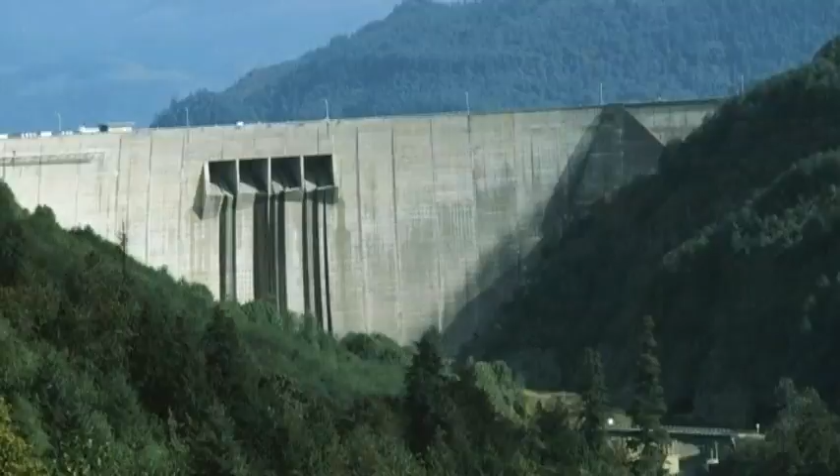Will you help us protect the world that we live in? This is the proposition of Trim Corporation Limited.

On the Earth that we live on, there are many problems that we have on our hands: global warming, air pollution, destruction of the ozone layer, contamination of seawater, and the heat island phenomenon. The garbage issue is an especially alarming matter. The illegal dumping of garbage prevails all over the country, and the environmental pollution it produces troubles Japan.

As part of this trend, some approaches for environmental improvements have been developed. The importance of recycling is growing.

However, among these, recycling glass bottles in particular has been falling behind. The amount being recycled is 350,000 tons. The recycling rate of glass bottles has halted before 40%. Why has recycling glass bottles been delayed in this area?

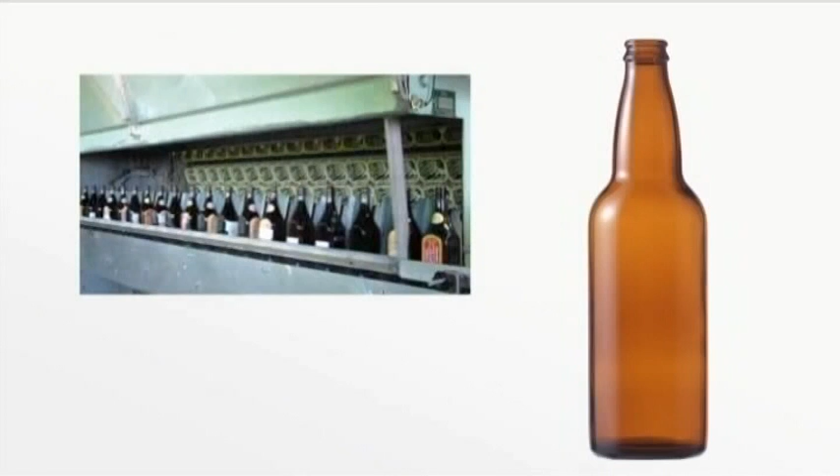There are two ways to recycle glass bottles. One is the returnable system, which reuses the used glass bottles repeatedly. The other is the one-way system, which uses the raw materials of new glass after smashing them to pieces.

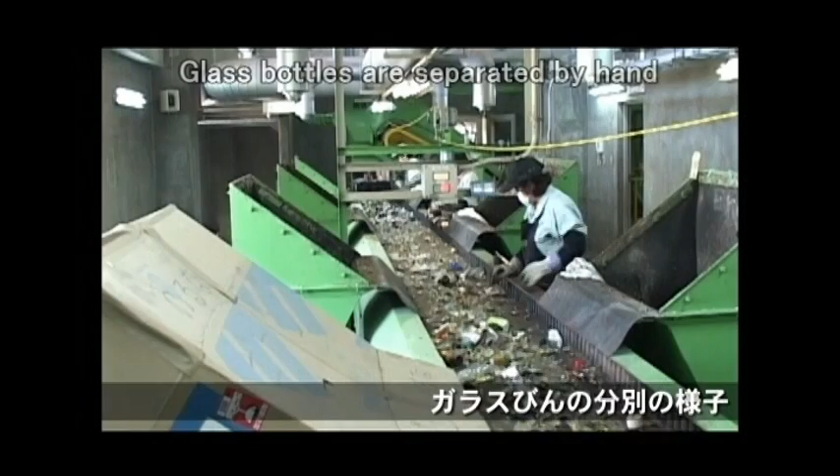Both ways cost time, effort, and money. Even today, at repository sites, glass bottles are still separated by hand. Among those are broken bottles to be handled with risks. A major stumbling block in the garbage issue is the recycling of glass bottles.

Are we actually able to recycle these glass bottles? This was the matter that became the starting point for the recycling business of Trim Corporation Limited.

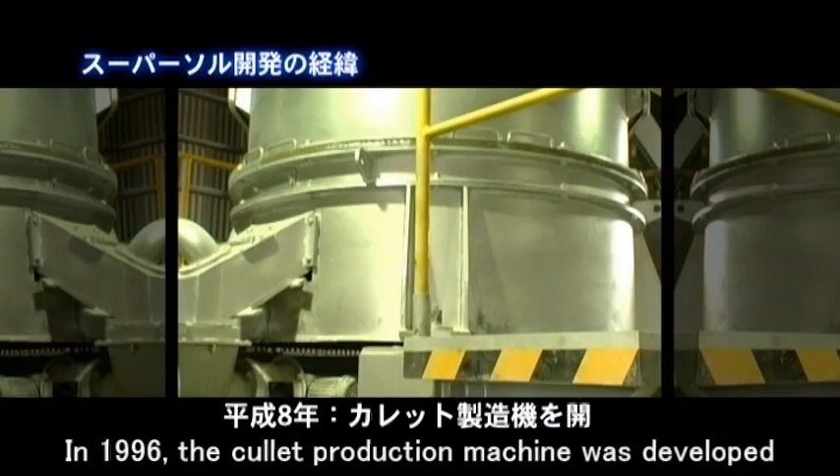In 1995, a project team to recycle glass bottles was formed. In 1996, the cullet production machine was developed. We won the top prize at the Industrials Festival in Okinawa. We invested and studied even more to enhance the system.

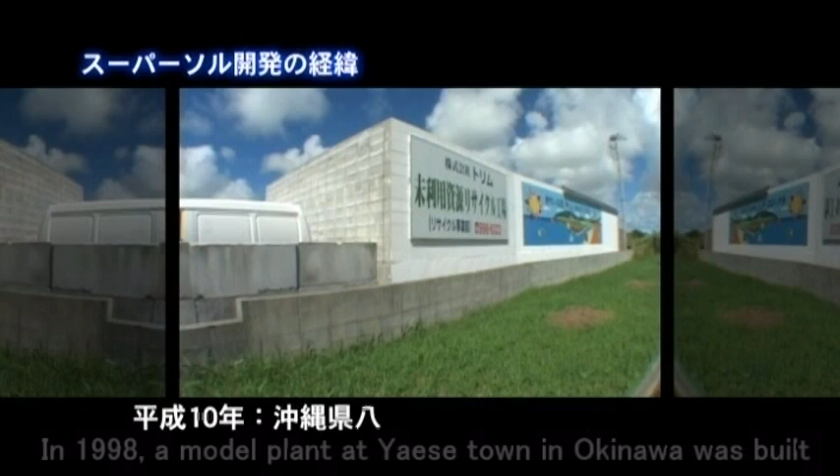In 1998, a model plant at Yaese Town in Okinawa was built. In 1999, the creation of the lightweight material Supersol was started. Then the recycling business of Trim Corporation Limited was fully put into action. In a variety of areas, a huge demand for Supersol was born.

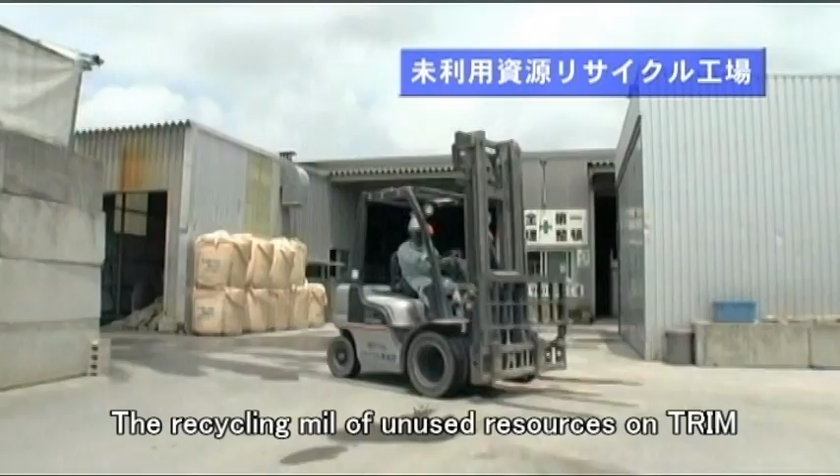The recycling mill of unused resources at Trim Corporation Limited can produce this material Supersol, which is completely different from the shape and features of glass, although made from glass bottles.

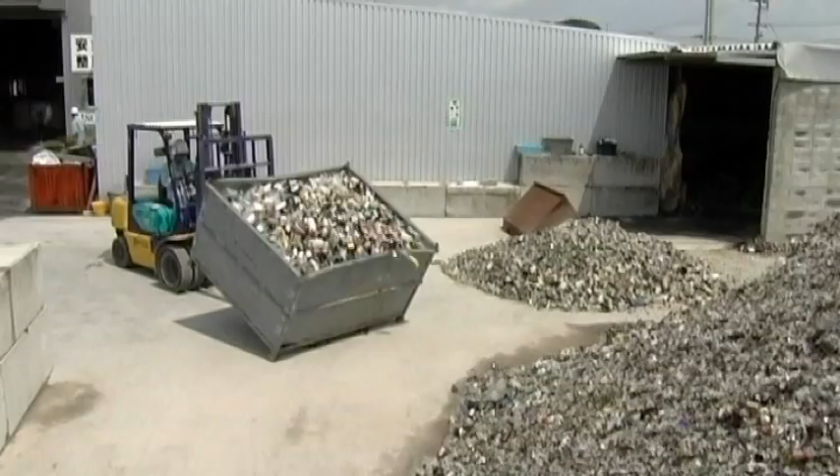The recycled glass bottles used at this mill are the same waste-collected bottles from the community. Regardless of color, size, and shape, you only have to throw the glass bottles into the machine. Then the Supersol is automatically produced.

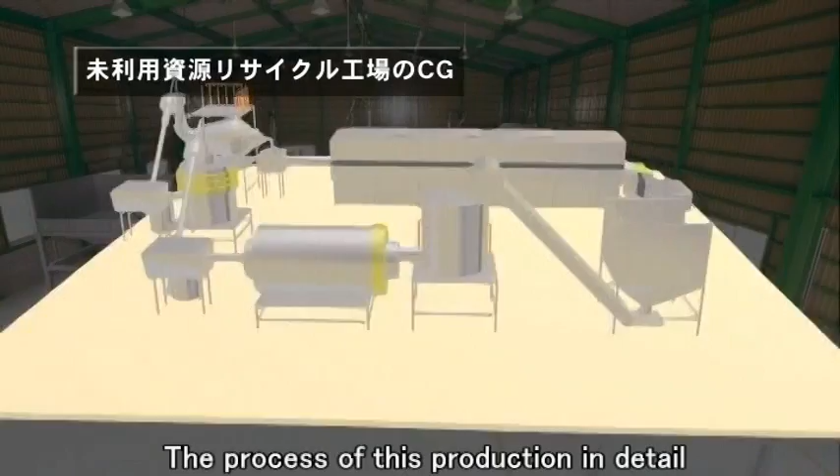Now, let's look at the process of this production in detail. First of all, the glass bottles are thrown into stock in the raw material hopper, then move automatically on the line.

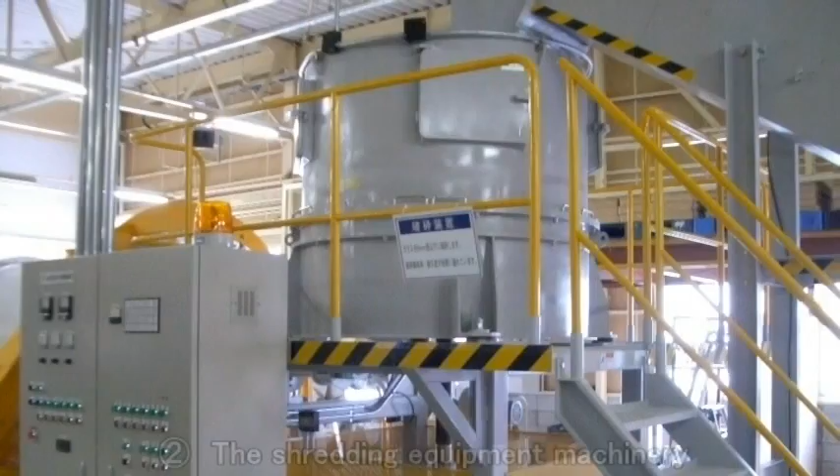Then they are smashed into very small pieces by the shredding equipment machinery. Though it is compact glass, even said to be harder than iron, they are pressed into small pieces.

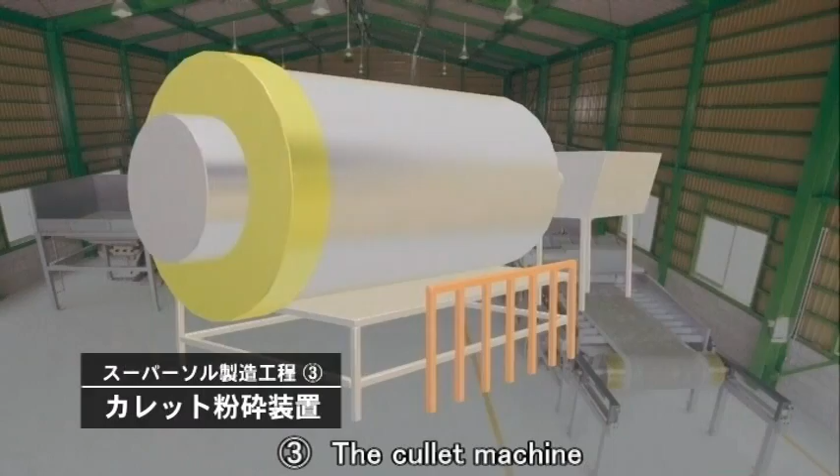The small pieces are routed to the cullet machine. On this pressing machine, the glass is crushed into a very soft, flour-like powder. It is hard to even think it was glass.

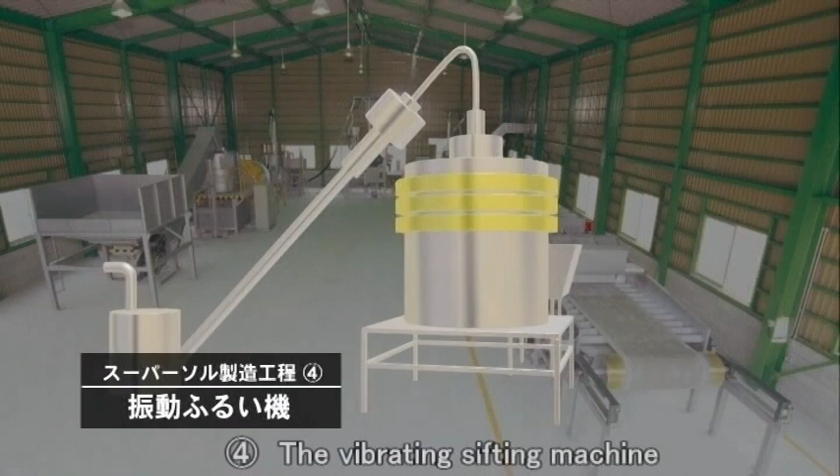The powdered glass is then moved to the vibrating sifting machine to specifically select only the finest powder.

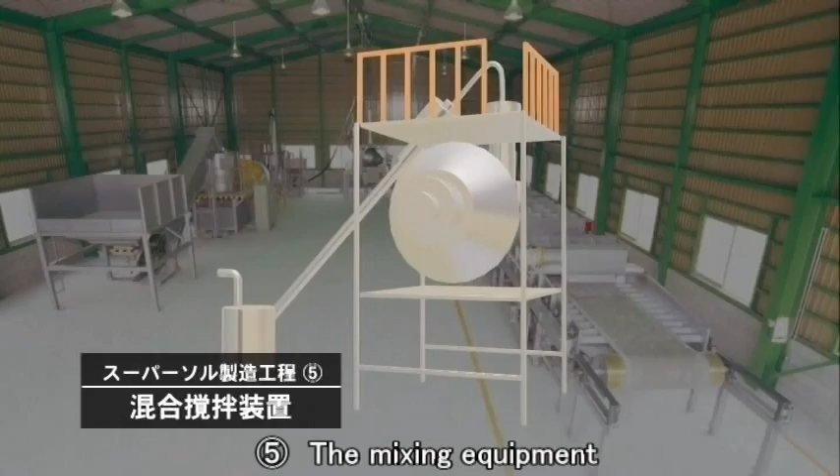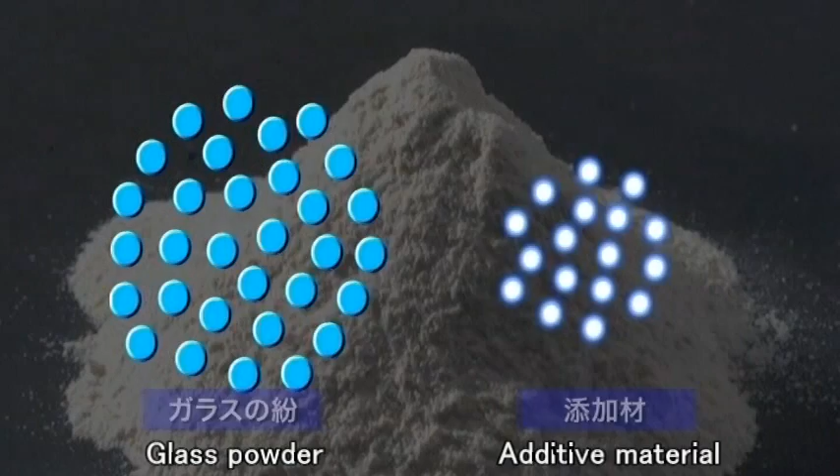Next, the glass powder is placed into the mixing equipment, where it is automatically mixed with only 1% additive material. Evenly mixing and sifting the glass powder and additive material, this process can finally produce Supersol with consistency and quality.

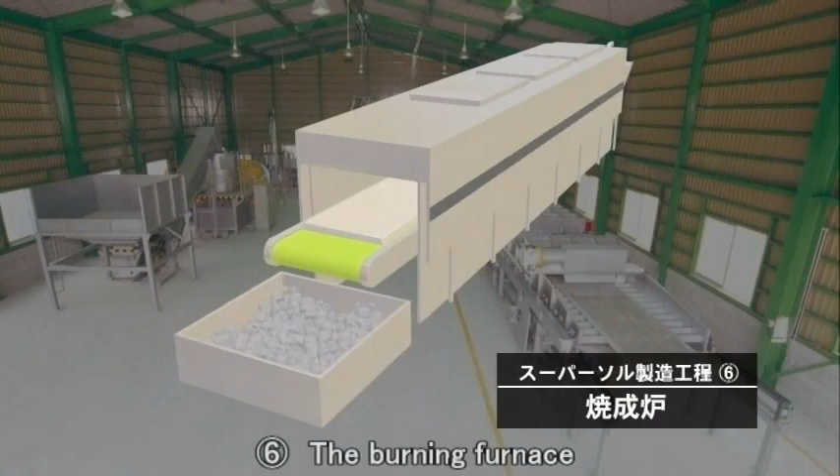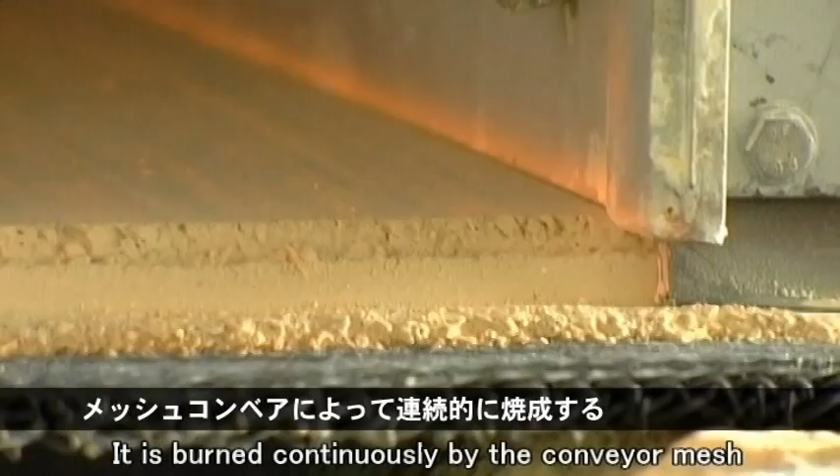Finally, the glass powder is transferred to the burning furnace to be reborn into Supersol. It is burned continuously by the conveyor mesh. The temperature of the firing furnace can be adjusted so that the process is completed with high-quality detail and care.

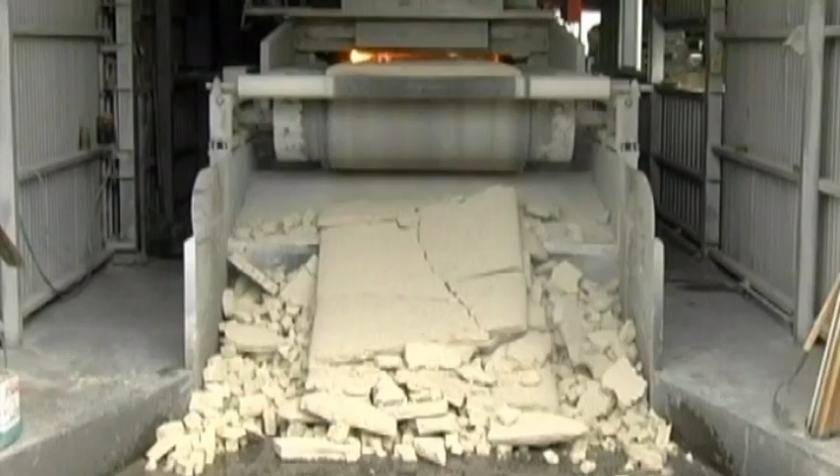By following this process, the foamed and inflated powder is drastically cooled down by coming in contact with the air and is broken up into smaller sizes.

The Supersol can be created to suit various needs because there is a lot of flexibility in the creation process, such as specific gravity, the intake rate, and so on. This is how Supersol is created.

Glass bottles have been reborn into a different shape and behavior, a completely new product. With its highly valued add-on features, Supersol is in high demand for various areas.

Now we will introduce the special features of Supersol.

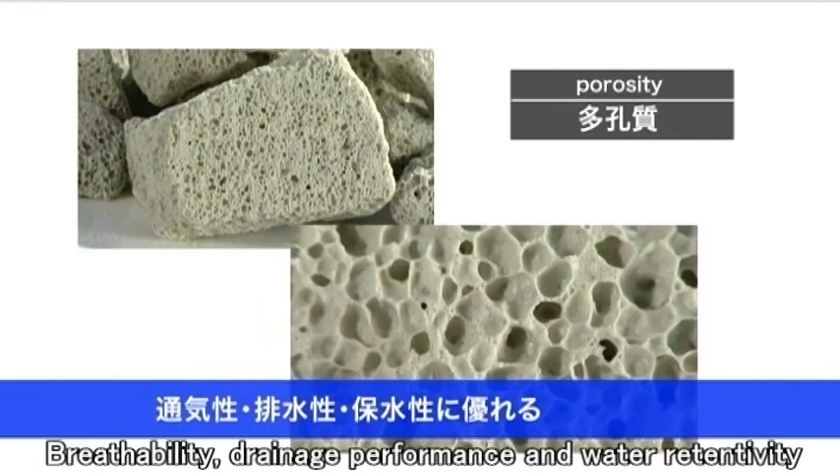One of the big features of Supersol is porosity. It is very useful for various areas, such as tree planting or civil engineering work, because of its breathability, drainage performance, and water retentivity. It is also said to be an inorganic mineral. It can be used in harsh conditions because of its high resistance to temperature, water, and chemicals.

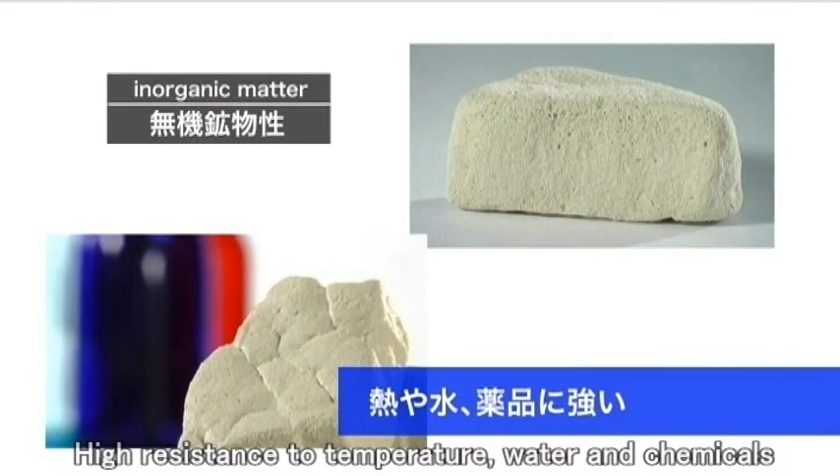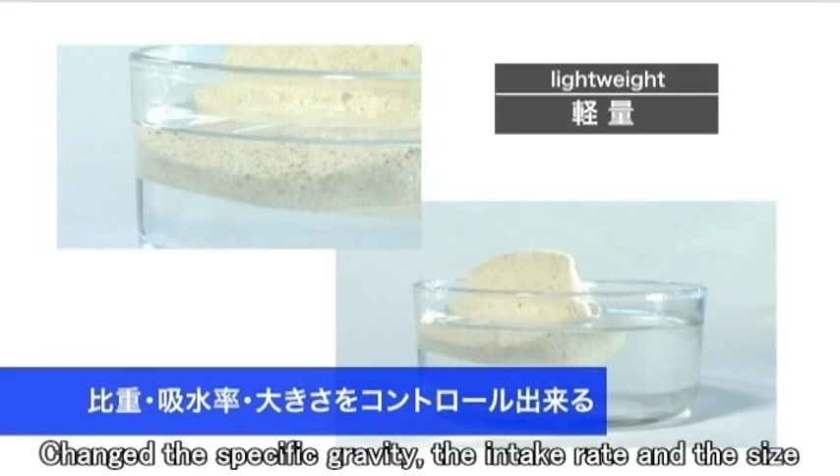And the most peculiar point is its weight. It's very light, light enough to float on water, so it can be adjusted to match a specific gravity by changing the intake rate and the size, giving complete control to match the product to its use.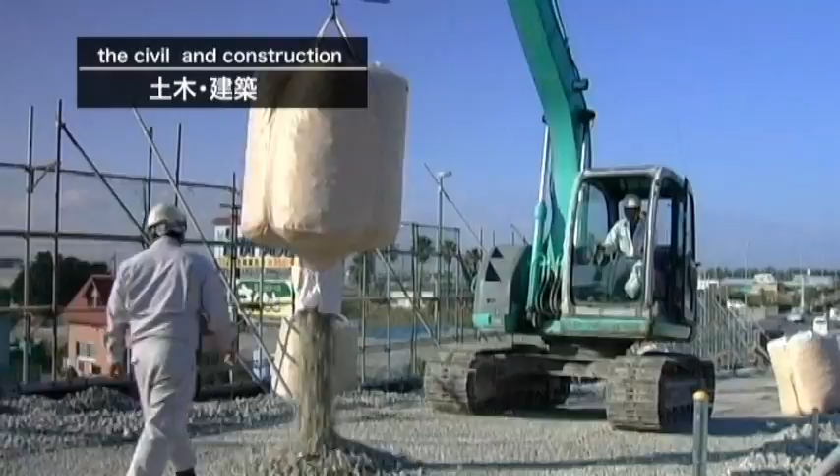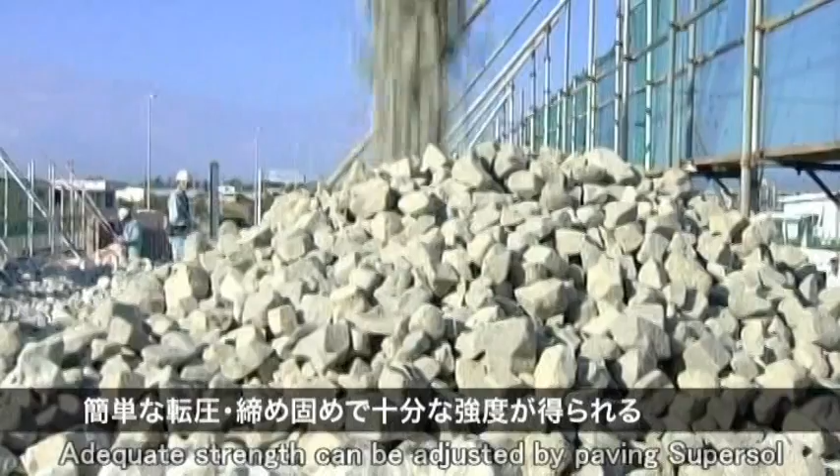Let's look at an example of it being used in construction areas. It is easy to use in construction because of its lightweight features. It can simply be mixed with soil to become a non-pressure weight against any man-made walls. Adequate strength can be adjusted by paving Supersol through basic surface compaction and soil tamping.

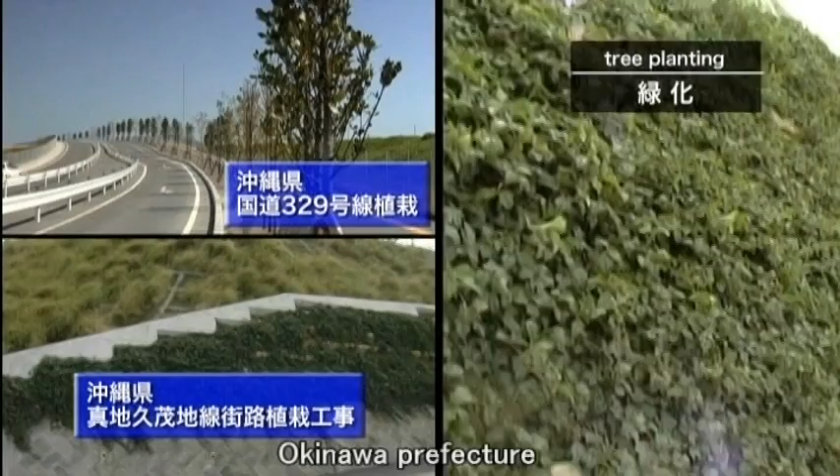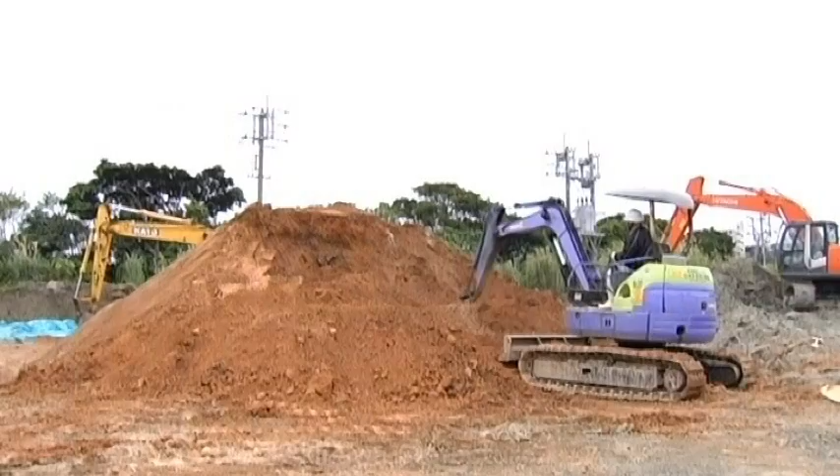It also draws attention by being used as a material in tree planting. Porosity as a feature of Supersol keeps the balance of fluid or air in the soil for plants. Therefore, it is used as material for planting trees in many fields. In such cases of using Supersol in planting work, it is mainly used as a soil conditioner.

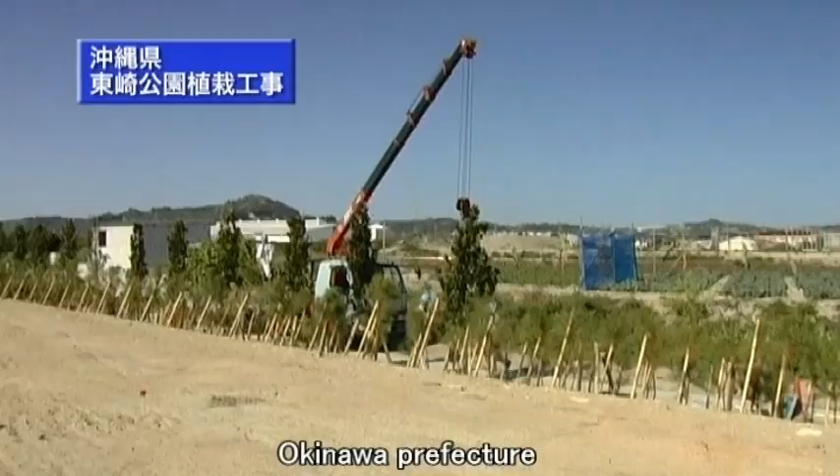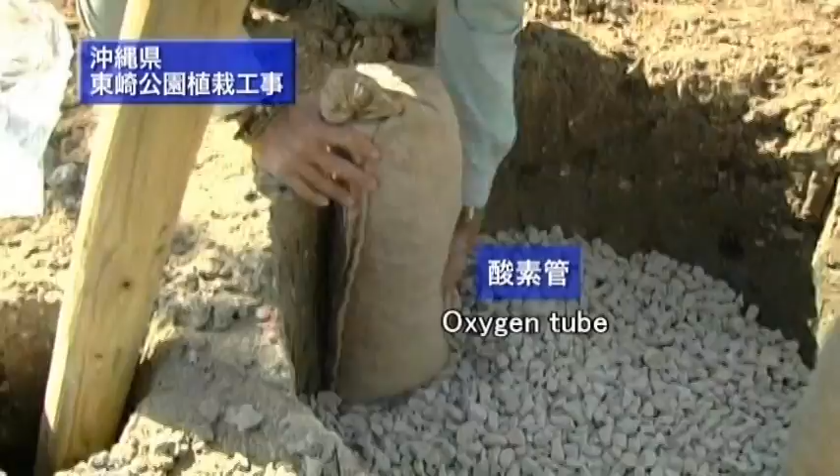In this park, planting work with Supersol and oxygen tubes took place. After lining a hole for planting with Supersol, oxygen tubes can be plowed in. This oxygen tube that includes the Supersol can make the aeration property for plants better.

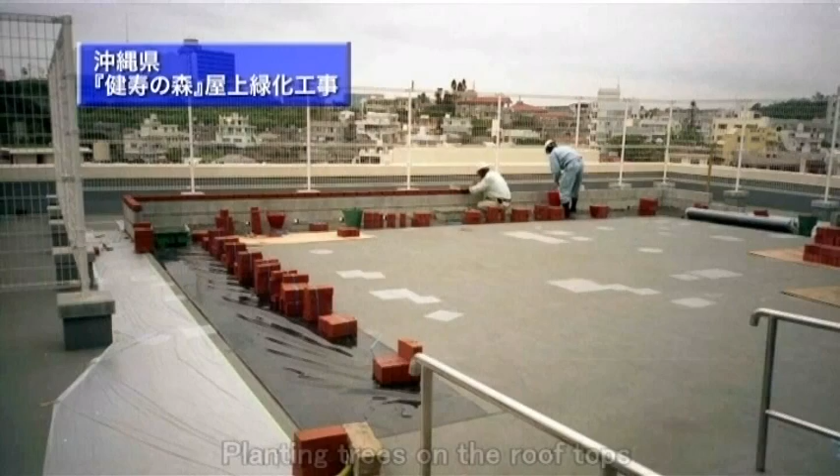Supersol is very useful even in planting trees on rooftops. The Supersol construction method reduces the burden and makes planting work very easy. That is why significant cost cutting can take place.

It is also used as the aggregate for heat insulating blocks. The Supersol SunGuard is an excellent material for heat insulation. By simply placing it on the roof, the room temperature is lowered.

Supersol is also used for large-size green planting indoors. In the grass establishment of this resort hotel, it is put in place as a new system without soil. A mix of brick stone and Supersol is used instead of soil. It is easier to manage plants and the building using this than using soil, as well as keeping the room cleaner by lowering the risk of fungus and contamination.

There are many other various forms of use: plantations in hospitals or schools, use as material for farming soil amendments or water quality clarification, sale as garden material in do-it-yourself stores, and much more.

This resort hotel uses EM glass stone, which introduced the EM technique to Supersol. A variety of plants, like vegetables, are being cropped in the garden on the roof.

In this way, we can see many examples of the highly valued material Supersol. It is expected to also be used in water clarification of sea and river, or bank protection projects, in the near future. Trim Corporation Limited will constantly brainstorm and work aggressively to raise the demand for their product.